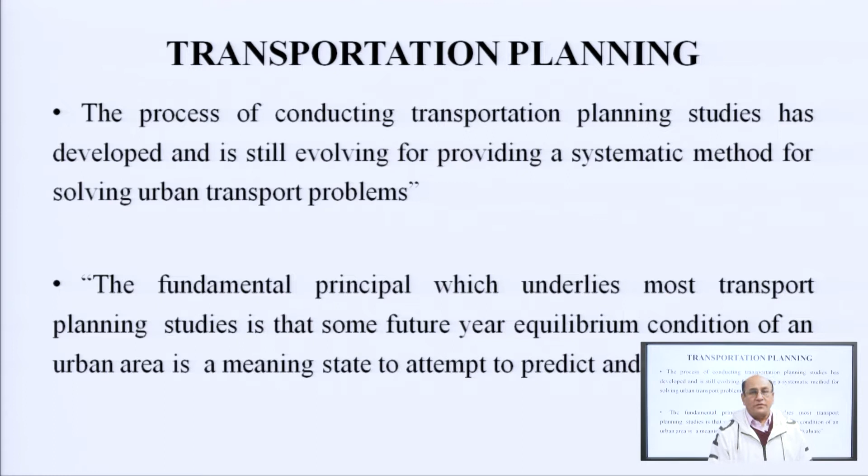So first of all, we go for transportation planning. What is transportation planning? The process of conducting transportation planning studies has developed and is still evolving, providing a systematic method for solving urban transport problems.

The fundamental principle which underlies most transport planning studies is that some future year equilibrium condition of an urban area is a state to attempt to predict and evaluate.

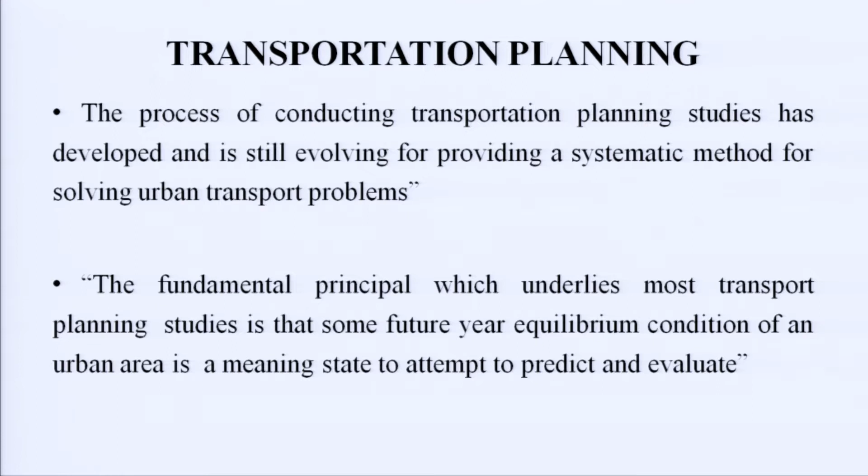Apart from this, in order to develop a good and efficient transport facility, it is necessary to have a proper planning procedure in place - development of a comprehensive plan for the construction and operation of transportation facilities.

This transportation planning should be continuous and dynamic, meaning every year or every time it should be changed as per the requirement of the city and urban areas. It should be sensitive to continuing changes in socio-economic needs, technology, and financial status of the state and its people.

The planning should be rational, that is methodical rather than political, where decisions on construction and operation of transportation are taken by political functionaries to gain short term popularity.

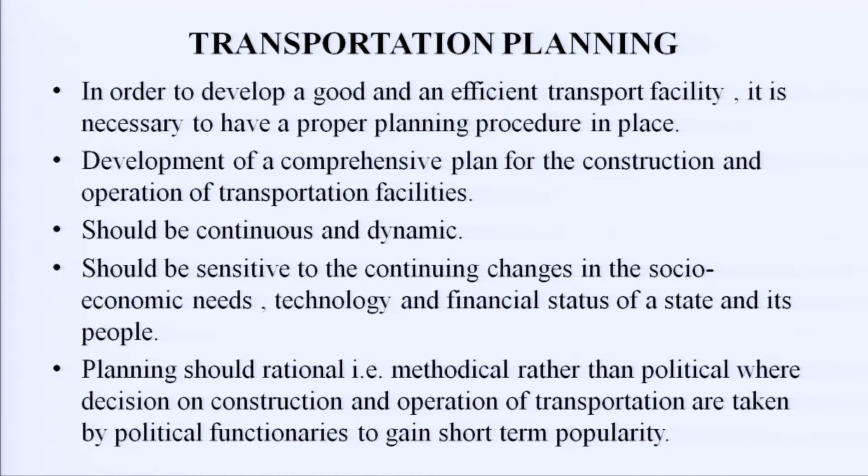In such cases, more often than not, the development is piecemeal and crisis mitigation oriented, leading to largely inefficient use of limited resources.

Being a developing country, resources are limited in our country for development of urban transportation. So whatever financial constraints are there, that should be implemented, and utilization of resources must be done at full capacity, meaning utilization shall be for the benefit of the maximum people and society.

It is an activity or process that examines the potential of future action to guide a situation or system towards a desired direction - first, towards the attainment of a positive goal; second, the avoidance of a problem; and third, both.

It is oriented towards the future, meaning whatever planning we are going to do should be for the future of the urban area. A planning activity occurs during one time period, but is concerned with action to be taken at various times in the future.

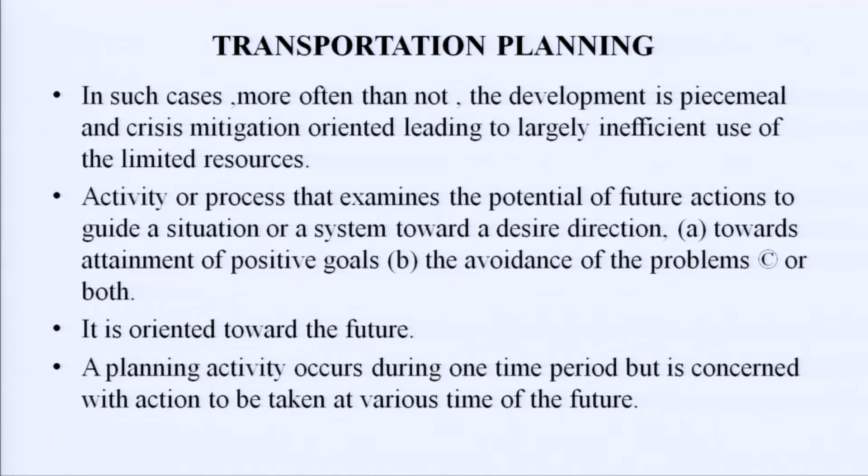Although planning may increase the likelihood that a recommended action will actually take place, it does not guarantee that the planned action will inevitably be implemented exactly as conceived or on schedule.

Another time element important to planning's forward-looking perspective is the lag between the time when action is taken and the time when its effects are felt. This time lag depends on many factors, including the scope and magnitude of the contemplated action.

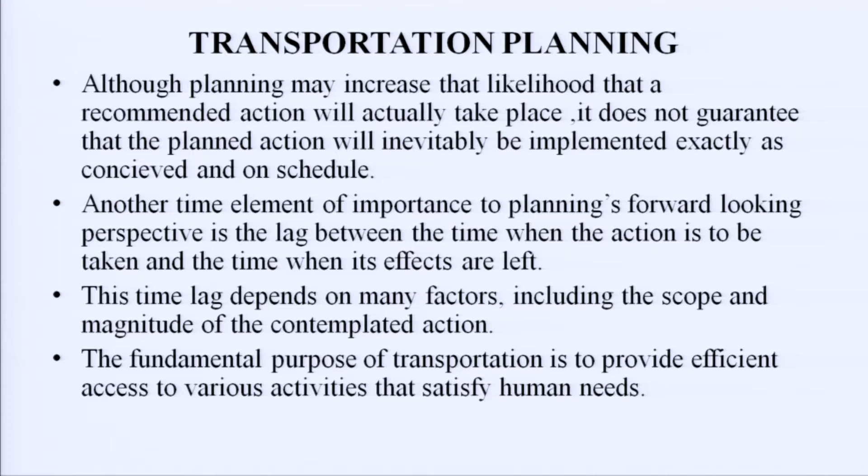The fundamental purpose of transportation is to provide efficient access to the various activities that satisfy human needs. So urban transportation system planning is the process that leads to decisions on transportation policies and programs.

In this process, planners develop information about the impact of implementing alternative courses of action involving transportation services, such as a new highway, bus route changes, or parking restrictions.

This information is used to help decision makers - elected officials or their representatives - in their selection of transportation policies and programs.

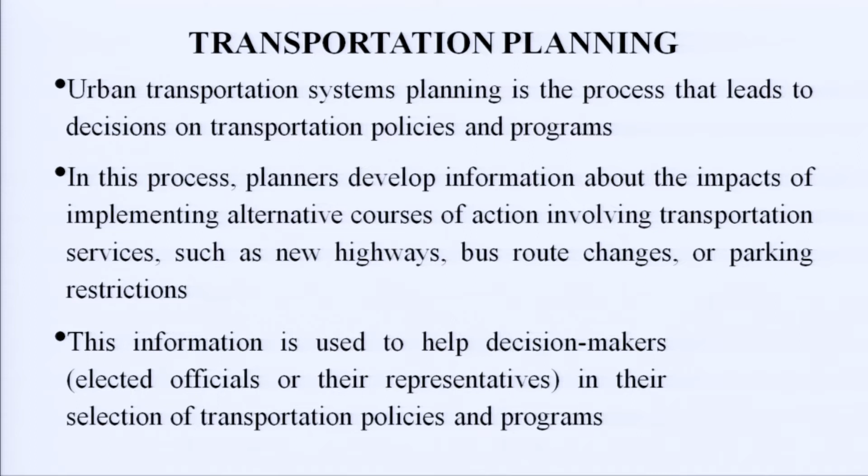The general goal of transportation planning is to accommodate the need for mobility. Faster urbanization is due to population and economic growth. In our country, population is growing at a very fast rate, and economic growth is too fast. So urbanization mainly depends upon the population and economic growth.

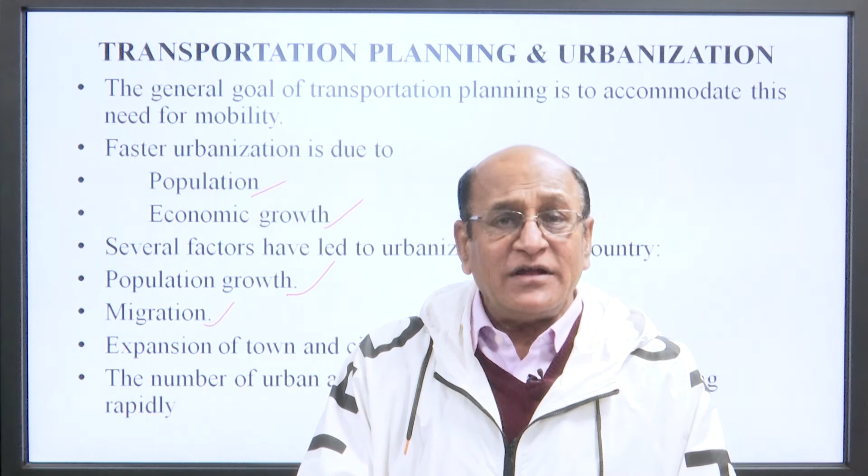Several factors have led to urbanization of the country. Population growth, as we have said, our country has a very rapid rate of population growth. Migration: people from the rural area used to come into the urban area for better employability, better medical facility, better children's education and so on. So they are also providing pressure on the urban areas. Expansion of towns and cities.

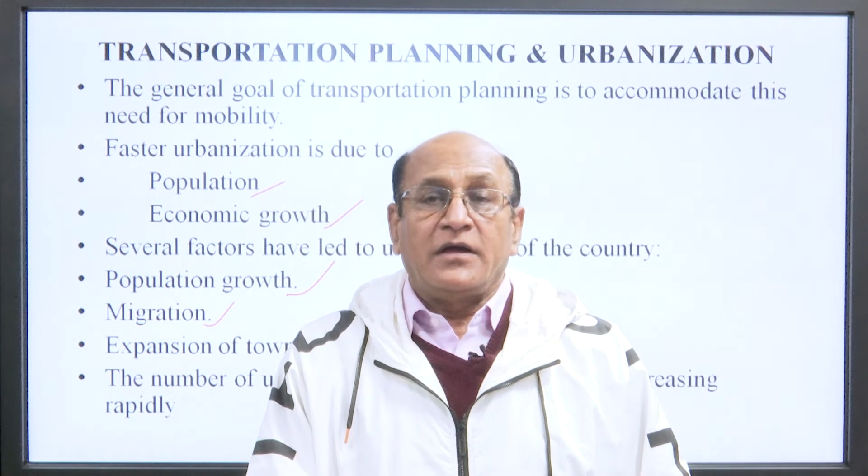Apart from this, cities or towns are self-expanding. Every year, certain areas are developed and included in the urbanization. The number of urban agglomerations and cities is increasing rapidly. A rapid urbanization has led to increased travel demand.

Urban transportation system planning is the process that leads to decisions on transportation policies and programs. It is also required to support the complex activity patterns necessary for ensuring the vitality of the urban areas.

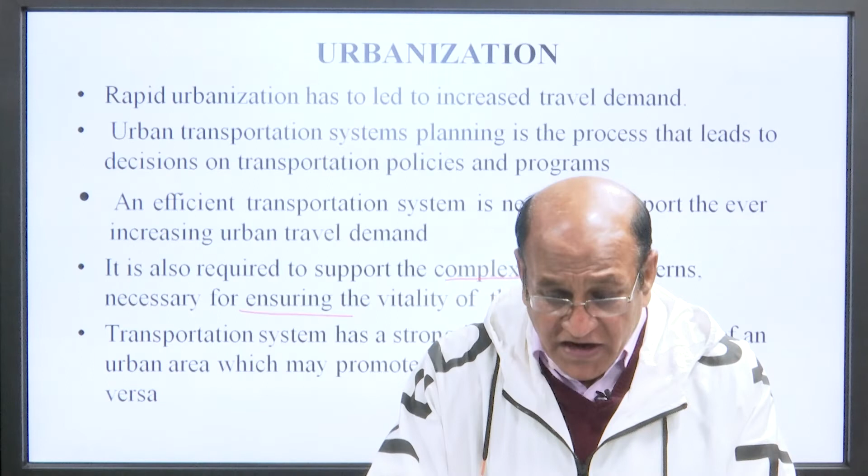The transportation system has a strong influence on the growth of an urban area, which may promote or hinder development, or vice versa. We can say in India most of the cities are unplanned, developed in such a fashion that the transportation system may hinder the development of the cities.

Like Chandigarh itself, a very planned city, where you can say the development is in a proper way. So the transportation system has a very strong influence on the growth of the urban areas.

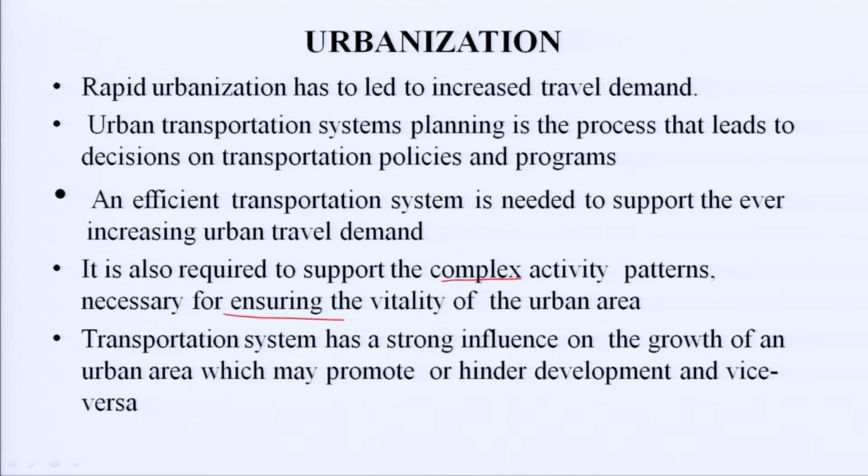The travel demand is further aggravated due to increased use of private vehicles. Why private vehicles? Because the public transport system is not so efficient in the urban area. So private vehicles are used to meet the travel demand.

Our travel demand is a derived demand. What does it mean by derived? Derived means the mere purpose of travel is another thing, like a school. A school is not located in the nearby area, or a hospital is not located in the nearby area, but people need to go to a school or a hospital or some market area. So the main purpose is to go to school, to go to hospital, or to purchase something in the area where there are shops. So it is called derived demand.

The percentage share of trips by public transport is ever decreasing due to its less attractiveness. Why less attractive? Because the city has a heterogeneous nature of transport users, meaning people of low class and middle class are also living in the city. And so the person who is above the middle class won't like to use public transport due to the condition of the transport vehicle, as well as the people who are travelling in the public transport system. So our public transport system is less attractive, meaning many people won't like to travel in the public transport.

The transportation in most cities of India predominantly remains a road-based transportation system. In our urban areas, the transportation system is based on road, meaning the total load comes onto the road. Except Kolkata and Mumbai, the rest of the cities do not have a suburban transport system or suburban railways. So the total load of transportation is coming on the road. So it is very necessary to study the things such that road transport should be attractive and should take care of all persons or travelers in the urban areas.

The road capacity has not been augmented up to the level and has lagged far behind the demand due to fiscal and physical constraints. The condition of the public transport system is not good, or we can say that the level of service is not up to a standard level. So what happened? There is another thing: financial and physical, they are two constraints. Financial means financial resources, and physical means the physical availability of land, meaning land use.

If we have resources, it means the government or authority has provided money for the development of the road, for widening it, or for constructing a bridge in the urban area. But it may not be possible to widen the road because there is already dense or permanent development on both sides of the road.

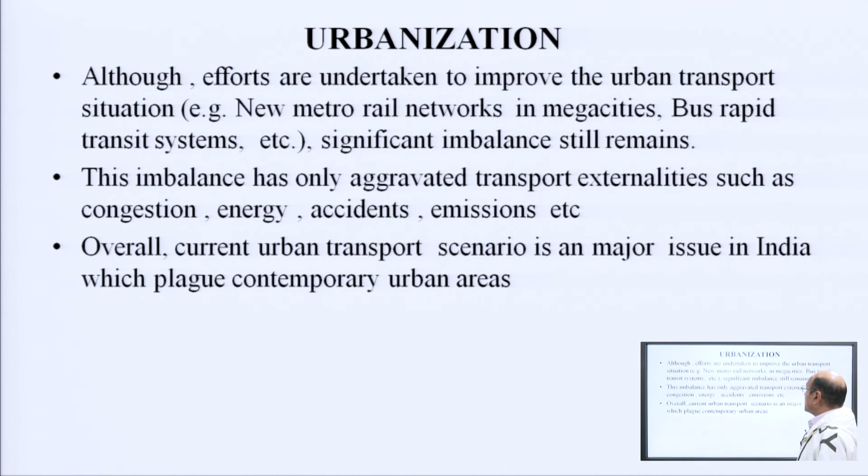Although efforts are undertaken to improve the urban transport situation, such as new metro rail networks in mega cities and bus rapid transit systems, significant imbalance still remains. Of course, metro systems are now constructed in many cities and used by all types of gentry because they are clean, quite comfortable and hindrance-free.

Despite that, the metro rail network is not in sufficient quantity. This imbalance has only aggravated transport externalities such as congestion, energy, accident and emission. These are the four parameters available for the imbalance, so we will discuss congestion in urban areas.

First thing we face is congestion. We will not reach the destination in proper time due to congestion, and there is a problem of embarrassing conditions. So in every urban area, this is the biggest problem, and of course, during congestion the engine will be on for a longer time.

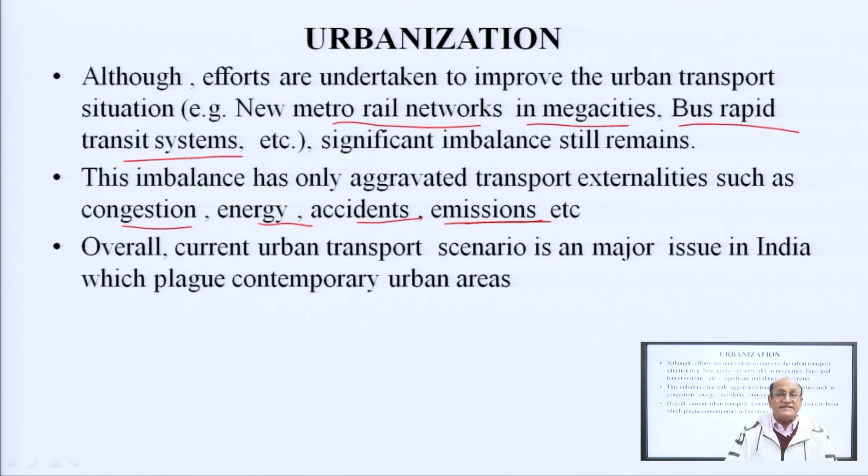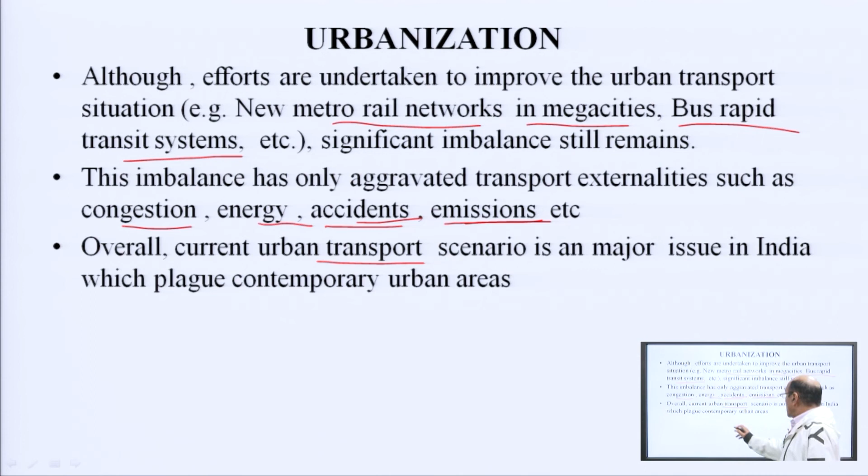So energy will be used more, meaning fuel will be used more, and as fuel is used more and more, the emission will be more, meaning carbon or greenhouse gases will be produced more during congestion, and this also leads to accidents. So overall, the current urban transport scenario is a major issue in India which plagues contemporary urban areas.

Any country, state or locality has a vision for its future. The government has already announced a new urban transport policy - Government of India has announced it. This vision is generally articulated through various elected bodies and may change from time to time as the aspirations of the people change.

This leads to the goal and objective relating to better mobility and connectivity which one wants to achieve. Goals and objectives to be achieved through transportation are often stated as policies to be pursued by different elected bodies. Being a democratic country, at different levels all committees are headed by elected people. These may be as general as improving connectivity, or as specific as reducing the travel time of vehicles on a certain section of the highway. This is our objective.